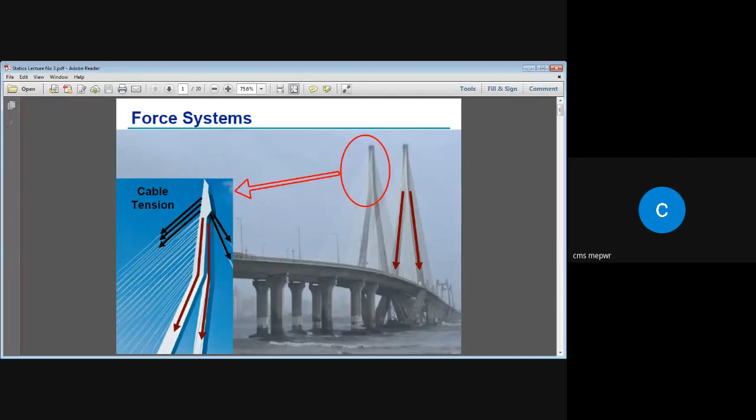Okay, so in our previous class, we discussed what is mechanics and what are the different types of mechanics. So we discussed two different categories of mechanics. One was statics and another one was dynamics. In dynamics, then there were kinetics and kinematics. Then we discussed particle, we discussed body, and then the basic concepts that can be utilized in mechanics, the basic units that can be used in engineering statics.

We studied vectors, vector addition, and how we can add them. So the different techniques like head to tail rule and parallelogram law, we did a number of problems on it, and I also gave you some of them as your home assignment. So in today's class, we are going to discuss force systems. For example, if you want to analyze a system, if you want to do its force analysis, how we can study those force systems.

As shown over here, for example, we are having this bridge, and this structure is basically supporting this bridge with the help of these wires or cables. If I magnify this view, you can see these are wires giving support to this structure, and this structure is further giving support to this bridge. So each of the cables is having tension in it. Now, if you want to calculate this tension, or design this cable, you must know the amount of external force that would act on this cable.

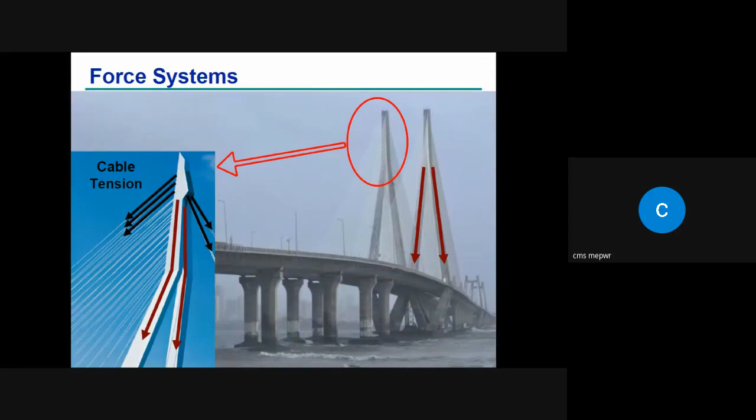So that's why, for proper design, you need to do force analysis. If you are having 1,000 forces, you cannot consider each of them separately. But you can consider all these forces together, or their net effect. Okay, so let's continue with force system. For example, if you are having this system, consider this bar.

Now, if I apply an external force F or external force P on this bar, here it is connected with this support, or bracket, or foundation. So when I apply force on it, the force will try to pull it in this direction, whereas this support or bracket will not allow this object to move in this direction, or in other words, it will apply a reactive force on this object in the opposite direction.

So the external forces applied on this object: one will be the force that we are applying from the outside, and the other one will be the reactive force that is applied on this bar from the supporting structure. It can be the foundation, or it can be the bracket, or it can be a bolt, or from any place. Okay. So let's see.

As we know, force is a vector; it can be represented as a vector, and force has both magnitude as well as direction. And in case of force, the point of application also plays a vital role. So magnitude, direction, and point of application. By considering the point of application, we can decide by looking at the scenario whether the vector is a fixed vector or a sliding vector. Sliding vector means it can change point of application along the line of action of force.

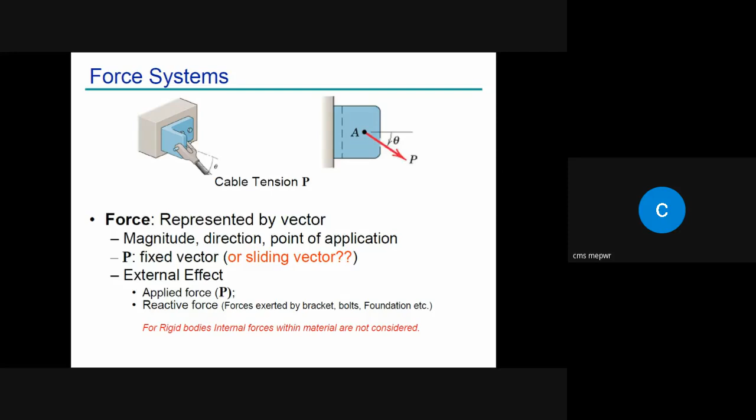Okay. So if you look at this system, the force that we have applied is neither horizontal nor vertical. If the force is horizontal, the net effect will be in the horizontal direction. If the force is in the vertical direction, the net effect will be in the vertical direction. Or in simple words, for our convention, the net effect will be in x or in y direction. But if the force is in some other orientation, it may have its effect in more than one direction. So let's study those things.

Okay, so the force system can be a planar force system, or it can be a force system in space. Space means three-dimensional force system. To start, we will consider only the two-dimensional force system. Meaning if we have a force inclined at a certain angle, we will assume that it has components in two axes only. The third axis, for the time being, we are not considering. We are considering planar forces.

So, two-dimensional force system. For example, if we have a force, imagine we have some coordinate system, let's say Cartesian coordinates, in which we have x, y; since there is no third dimension, the Z component will be missing in this case. So the axes that we are using are the X axis and Y axis. You can change the name, like A axis, B axis, something like this.

Okay, so imagine we have a force that is neither parallel to the X axis nor to the Y axis. Rather, it is making an angle theta with the positive x axis, and definitely it will have some angle with the Y axis. So this means the effect produced by this force will be in the X as well as in the Y, or the net effect is in between these two. So if I want to analyze this force system, I will find out its effect in the X direction as well as in the Y direction.

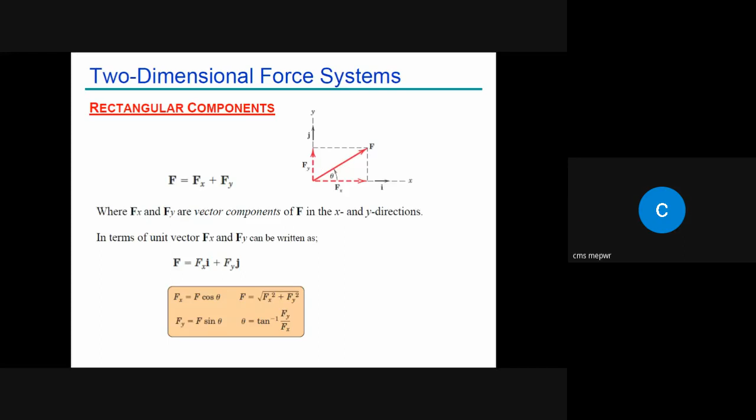Now we have studied the graphical method and the algebraic method in the head to tail rule. We just discussed that head to tail rule in our previous week's lectures. Now we have another method for vector addition, known as vector addition through rectangular components. For example, if we have a number of vectors, more than one vector—2, 3, 4, 5, 6, 7—we can also add them through their rectangular components.

How can we do it? In the very first step, we will divide the vector into its components. For example, here we are having three vectors, F1, F2, and F3.

So what we will do, we will divide it into their components. We will write this vector in terms of its components. So for example, this is F1. Since we are studying a two-dimensional force system, it will have two components, one along x, one along y. So x component of F1 and y component of F1.

To show the direction, we have to use the unit vector with it. Similarly, we can write F2 like this: x will be negative, y will be positive. And F3, x will be positive, y will be negative. So we have written all these three in their component form.

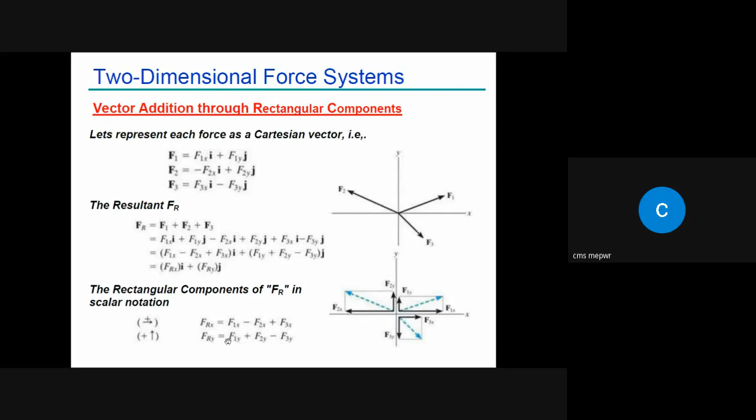So the x component will be represented by i, and the y component, meaning its direction, will be represented by unit vector j. So we can write this Frx in scalar form by removing the i. It will be F1x minus F2x plus F3x, meaning the summation of all components in the x direction, and similarly for y, the summation of all components in the y direction.

So we can also see that Frx, or the x component of the resultant vector, is basically the summation of the x components of all vectors, a summation of all components in the x direction. Fry is basically the summation of all components in the y direction.

Now to find out the magnitude of the resultant, we can use this equation again: the resultant vector squared is equal to the square of the x component of the resultant force plus the square of the y component of the resultant force. Add them and then take the square root. So Fr is equal to the square root of Frx squared plus Fry squared. This gives the magnitude of the resultant vector.

Similarly, if you want to find out the direction, it will again be perpendicular over base, or Fry by Frx, which is equal to tangent theta. To find theta, take the tangent to the other side, so theta will be tangent inverse of Fry by Frx.

So this is the method by which we can add a number of vectors—2, 3, 4, 5, 6—it doesn't matter how many vectors we have, we can add them. This method is known as addition through rectangular components, because we basically divide the vectors into their rectangular components, and then using those components we do the vector addition.

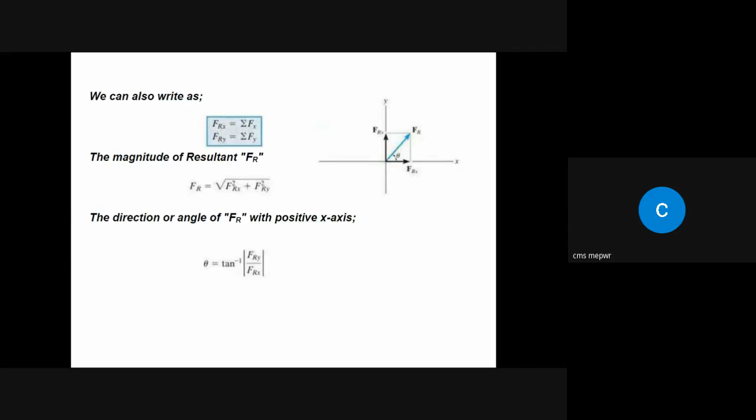Now in some cases, once we understand how to find the components, sometimes the word 'projection' is used instead. So if the word projection is used, how can we find that projection, or how can we find those components? For example, as one question was asked by Majid Kamal, we have this force F, and I want to find the components of this force. We definitely have two axes, X and Y, so this will have a component along X and a component along Y. Now the angle is beta.

So if I want to find the component of force along the x-axis, what will Fx be? Someone said cos theta. Jawad answered that Fx will be sin beta. Jawad just said it will be cos theta, but it will actually be sin theta. Why sin theta?

सर ये जो एंगल के सामने कंपोनेंट होता है, वो ऑलवेज साइन के साथ होता है। अब ये वाई एक्सिस के साथ एंगल गिवन है, तो इसके सामने जो है वो एफ साइन बीटा आएगा, फिर एफ एक्स आएगा। अच्छा, अगर जिस एक्सिस के साथ एंगल गिवन है वो उस एक्सिस के साथ कॉस आएगा, तो यहाँ पे एंगल गिवन है, इसके साथ कॉस आएगा, ऑपोजिट पे साइन आएगा।

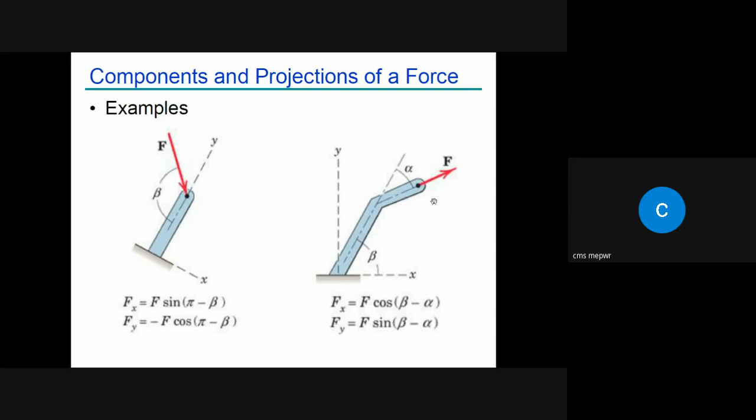If I want to find out the angle between F and horizontal, वो कितना होगा? Beta minus alpha. Okay. So the component of F along x, it will be Fx or F cos of angle, and the angle will be beta minus alpha. Similarly, with y, it will be sine beta minus alpha.

Is it clear? So sometimes you need to analyze angle in this way. The best way is to make a free body diagram. Once you make a free body diagram, चीजें काफी ज्यादा clear हो जाती. If I draw a line over here and I draw this line, I will observe that it's similar to this one. So it becomes very much easy. That's why you need to draw so many diagrams in your statics course.

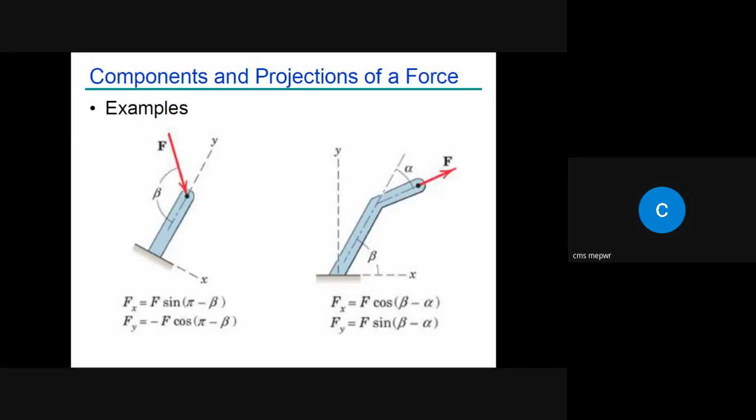Okay, then let's come towards the example. Find the x and y scalar components of F1, F2, F3 acting at point A on the bracket. This is point A, and this is force F1. This is very simple, the angle is given and force is given. This is x-axis, this is y-axis. So x component will be F1 cos theta, and y will be F sin theta. Okay. Now let's come toward this one.

Fx will be negative, Fy will be positive. We have force, but we don't have this angle, right? So can we find out this angle? Yes sir, 3 4 5 triangle है तो उससे हम लोग निकाल सकते हैं. Okay, if I want to find out F cos theta, what would be cos theta? Cos theta is base by hypotenuse. How much will be the hypotenuse? Using Pythagoras theorem, 4 square plus 3 square is 25, so 5. So cos theta is base by hypotenuse, 4 by 5.

So 500 into 4 by 5, right? You can do it this way, or you can find out the angle and put the angle in your equation. That is also an easy way. Okay, now let's come towards this one. These two have been solved. We have this one, and force is 800 Newton, but we don't have the angle.

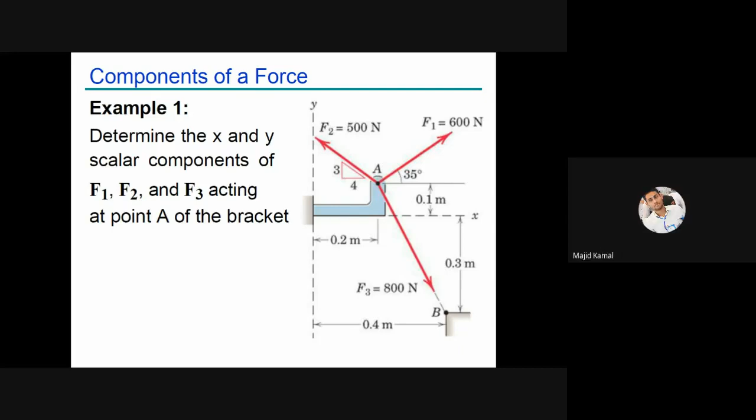Now we have this distance and this distance. Can I find out this angle? Yes sir, tangent. If I find this angle, it's very easy to find this component as well as this component. So for F1, the angle is 35. For F2, the angle is this one, so you can either find the angle, or cos will be 4 by 5. F2x is equal to 500 into 4 by 5, and F2y will be sine theta, or instead of sine theta you can put 3 by 5.

Let's say this angle is alpha. How can we find alpha? As you identified, this is 0.4, this is 0.2. So we can use tangent alpha, equal to perpendicular by base, 0.2 by 0.4. So tangent alpha is 0.2 divided by 0.4, and alpha is equal to tangent inverse of 0.2 divided by 0.4, and this angle

will come out. Now F3x, F3y you can easily find out. F3x will be positive, F3y will be negative. So these are the components. Is it clear? Yes, sir.

Okay, you can also find it out in terms of unit vector. So we know that vector is equal to magnitude multiplied by its direction. Vector is a combination of two things, that is magnitude along with the direction, or instead of direction we can put the unit vector. And what is unit vector? Unit vector is basically vector divided by its magnitude. So we can also find out this F3 by this way, like magnitude into unit vector. So vector divided by its magnitude.

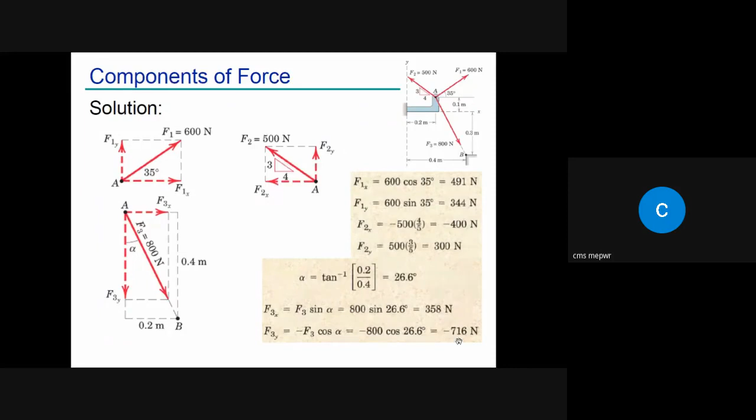So whenever some question is given, you need to apply the method that seems very much easy to you, जो आपके लिए सबसे आसान हो. So any method that is easier for you, you need to apply that method. Unless someone asks you to use this method, so आप free हैं कि आप कोई भी method use कर लें. अगर कोई आपसे पूछ ले कि ये method use करें, then in that case you have to follow the specific method. Otherwise you can use any method for your calculation.

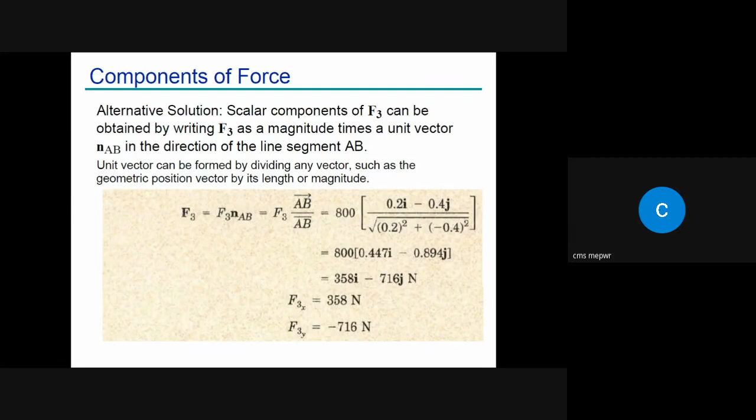Okay. Now let's check another sample problem 2-2. We have the two forces P and T. Combine the two forces P and T which act on the fixed structure at B, at this point, into a single equivalent force R. It is just a simple case of vector addition.

So as per parallelogram law, if you have two forces, how can we add them? What will be the first step? Draw a parallelogram. How? Connect the tails of both of the vectors together. Okay, exactly. Very good. So connect the tails. So we connected the tails, right? And then draw a parallel line to this one and a parallel line to this one, and this will be the resultant vector.

Sir, G. G Majid. Okay, no, sir. Majid.

Acha. So this is basically the resultant. Now, if I want to do the graphical method, I will assume that, let's say, 200 Newton is equal to 1 centimeter. So this line will become 4 centimeter and this line will become 3 centimeter. But this one is easy. I will just draw a horizontal line. But how can I draw this line?

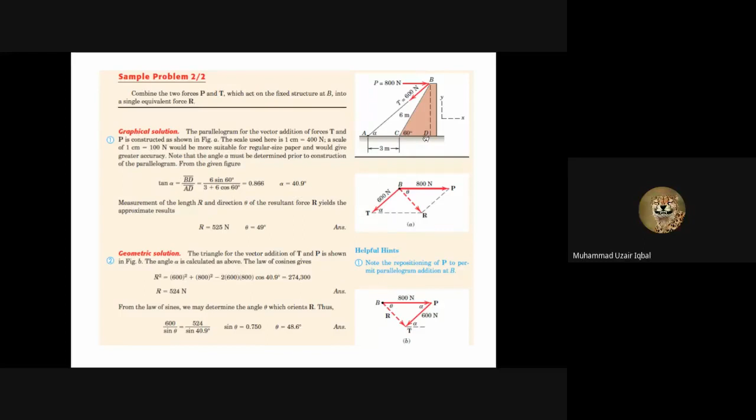What about this one? Sir, it will be 3 plus 6 cos 60. No, what about this one? CD. 6 cos of 60 degree, sir. Yes, it will be 6 cos 60, right? Yes, sir. Okay, so now we have complete x component, complete y component. So can we find out this angle alpha? Yes, sir.

What will be the x component? 3 plus 6 cos 60 degree. Okay, so you see, tangent alpha is perpendicular by base, so base is 3 plus 6 cos of 60. What about vertical? 6 sine of 60, right? So this is alpha. So when we do it graphically, we can use this angle 40.9. So this will be used now for further question.

So when you do it graphically, you calculate this R, whatever answer you get, you use the conversion that you assumed initially. Whatever scale you assumed, use it again and you will get the value of R. Find the angle of this R with horizontal axis and you will get that angle. So this is graphical method. Now you can use algebraic method or geometric solution.

Means how? You have this angle, right? Do you have this angle? Yes, sir. 40.9. Okay, and you have this 600 and this how much? 800. You want to find out R. So can you find it out by using any of the laws? Yes, sir. Which law will you use? Cosine law. So this square plus this square minus 2a into b into cos of angle opposite to this one. Right? Yes, sir.

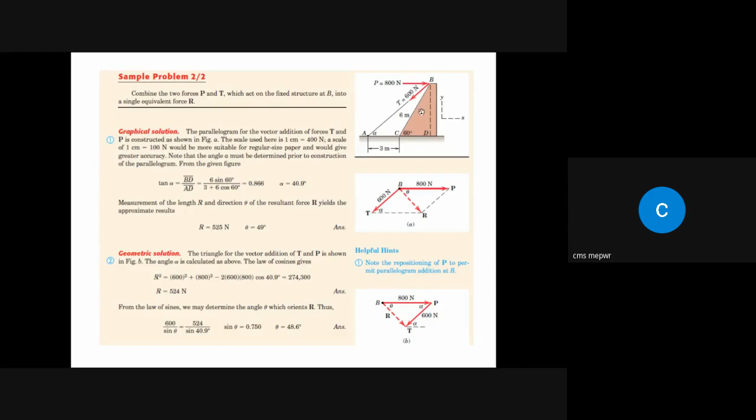Yes, sir. So you find out both the x component and the y component, add all components in x direction, all components in y direction, and find the magnitude of resultant and the angle. So you will get the required result. So by all three methods, we get the same answer. Is it clear? Yes, sir. And since you have both x and y components, you can write the vector in terms of unit vectors i and j.

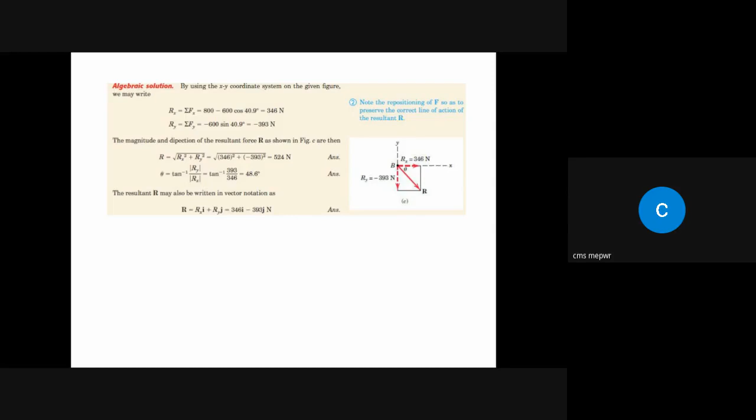Now the sample problem 2-4. What is given over here? We have forces F1 and F2. What you need to find out: determine the projection of the resultant on the b-axis. Means we have these two forces. Add them and find the resultant. Once the resultant is obtained, you need to find the projection of resultant on b-axis. Is it clear?

Okay, so let's see. This is force F1, this is force F2. So how can I add it? How can we add them?

Parallelogram. Draw a parallel line to this one and a parallel line to this one, and draw a diagonal. This is basically the resultant, right? This angle is 20, this angle is 30. So the total angle will become how much? 20 plus 30, 50, right? So this is 50. This means this angle is how much?

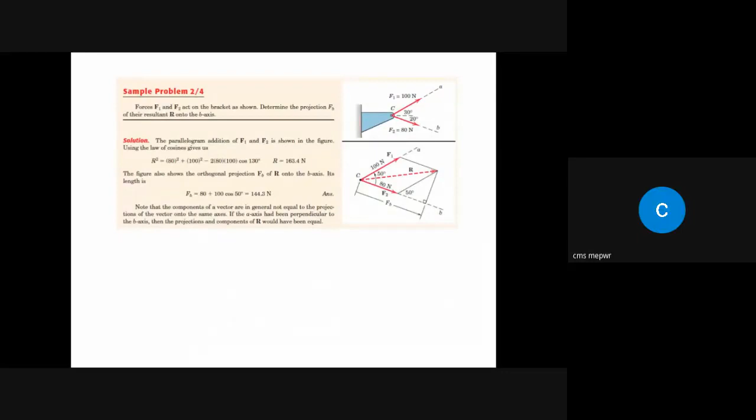Now, let's move towards the exercise problem. The line of action of the 9.6 kilonewton force F runs through points A and B as shown in the figure. Determine the X and Y scalar components of F. We need to find out its X component and its Y component. If we get this angle, the X component will be simply F cos theta and Y will be simply F sin theta, right? So if I get this distance

and this distance, क्या मैं एंगल फिर फाइंड आउट कर सकता हूँ अगर ये डिस्टेंस मुझे मिल जाए? Yes sir. So how can I get this distance? This distance is x. इस पॉइंट का जो x है वो सेम रहेगा. So x2 minus x1 will give me x, and y2 minus y1 will give me this y distance.

x2 is 300, x1 is minus 150. So 300 minus minus 150 becomes 450. And similarly y2 minus y1, I have written over here. So now perpendicular by base से आप angle निकाल सकते हैं, 30 by 45. So you get 33.7. Then fx is equal to f cos theta, fy is equal to f sin theta, and you can find the required result. These problems are just to build your concept.

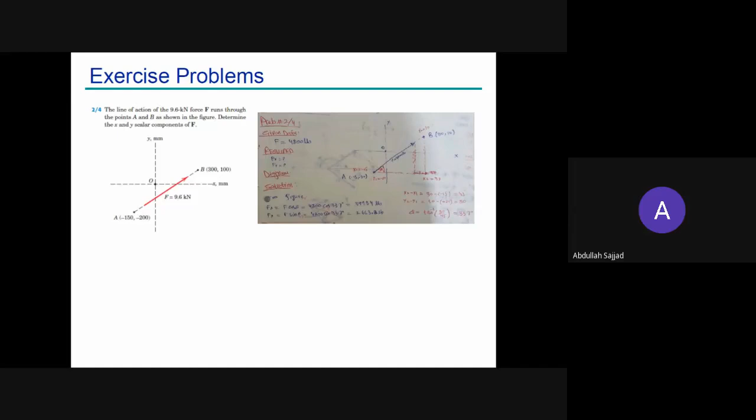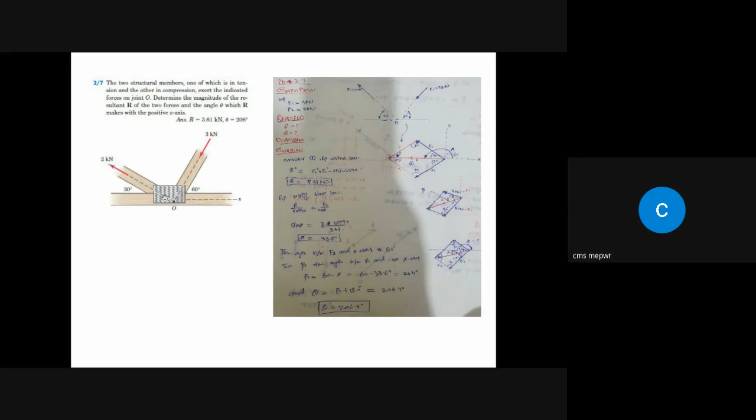Now you see, the T component of force F is known to be 75 Newton. Determine the N component and magnitude of F. We have this force F, this axis is T, this axis is N. This force is making an angle of 10 degrees with the horizontal axis, and the T axis is making an angle of 30 degrees with the horizontal axis. Ft is given, it is 75. We need to find Fn, and we also need to find the magnitude of F.

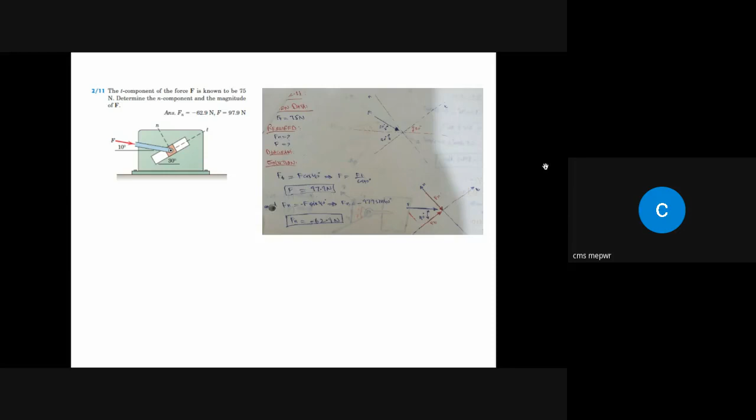Yes sir. Okay, now what they are saying: determine the magnitude Fs of tensile spring force in order that the resultant of Fs and F is a vertical force. What Fs basically, spring force.

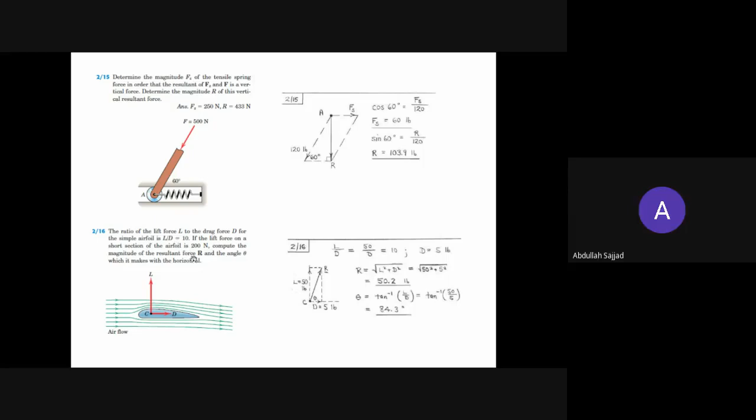Compute the magnitude of resultant force R and the angle which it makes with the horizontal. So what you need to do, this is L, this is D, and you need to find the resultant. Simply draw the parallelogram. This will be the resultant.

Find the magnitude of this resultant. It's very much easy. You have this force, you have this force, you have both of these forces. But again, the units in this case are changed, so you need to use these values, not this one, just for concept. So find out this resultant and also this angle.

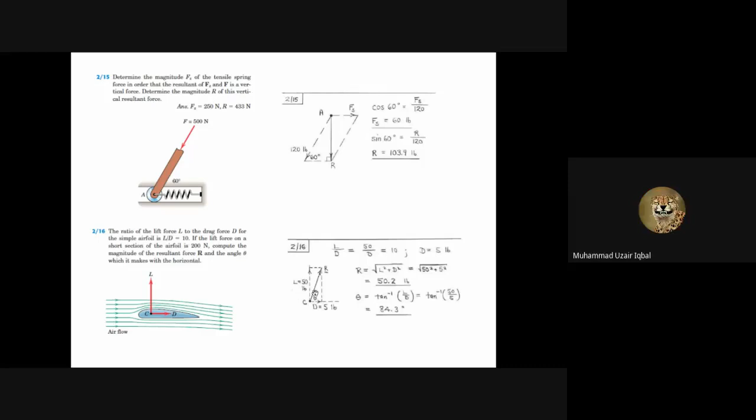Okay, now this problem is a little bit tricky. Imagine this is like your automobile or your car clutch mechanism or brake mechanism.

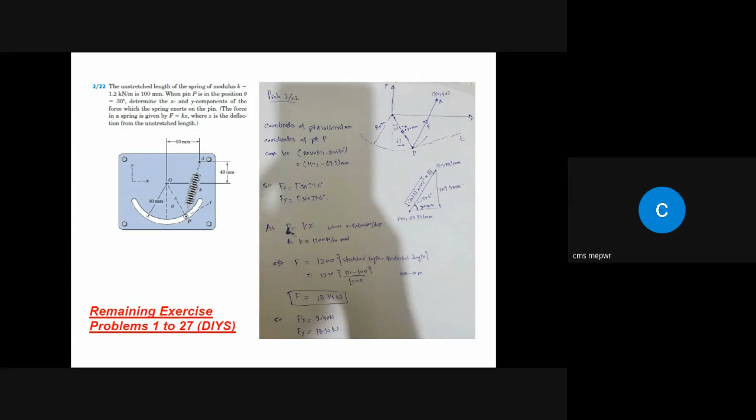So now what you need to do, you need to cover all problems from chapter 2, problem 1 to 27. Today we actually started chapter 2 for this topic, means for 2D force system. What you need to do, you need to do problems from 1 to 27. उसमें से जितने मैंने कर लिए हैं वो हो गए, remaining is your home task, so you can do it by yourself. If you are having any question, you can ask. This is lecture number 3.

सर क्वेश्चन है कोई? सर प्रॉब्लम ज्यादा नहीं, समझ नहीं है, दोबारा पूछ। सर प्रॉब्लम ज्यादा नहीं है, थोड़े तेज बोलें थोड़ा सा, मुझे समझ नहीं आ रही प्रॉब्लम क्या करें। सर प्रॉब्लम ज्यादा है, ये कह रहे हैं।

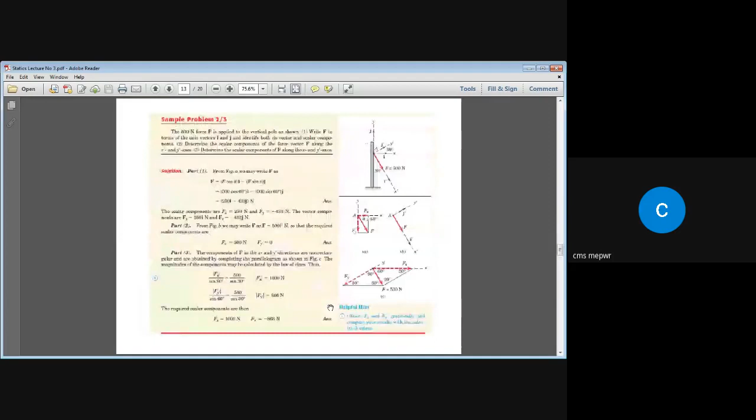प्रॉब्लम्स तो खैर ज्यादा हैं। मैं बुक बता दूं, बुक खोल के देख लें प्रॉब्लम्स कितनी हैं। ठीक है, इट्स अप टू यू, अगर आप कोई भी प्रॉब्लम ना करें तो इट डजंट मैटर, लेकिन आपको समझ आनी चाहिए। लेकिन समझ विदाउट प्रैक्टिस नहीं आ सकती, what you need to do, you need to do at least 2 or 3 problems of same type। जब आप बार बार करेंगे तो आपकी प्रैक्टिस हो जाएगी। इसमें देख लें यूजुअली हम कितने प्रॉब्लम्स करवाते हैं, एक आध करवा लेते हैं, आज मैंने 1 2 3 4 5 6 7 8 9 10 11 करवा दिए। ठीक है सर, कर लेंगे। ठीक है, थ्योरी के साथ ही। ओके, क्वेश्चन कोई है तो कर लें।

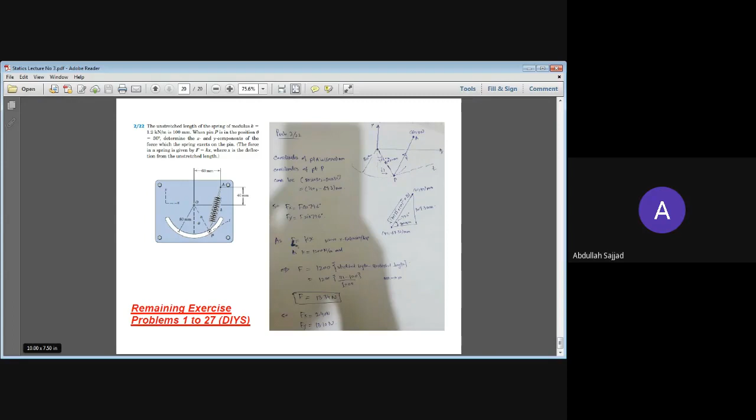नहीं है सर। नो क्वेश्चन सर, सर ये गूगल क्लास...